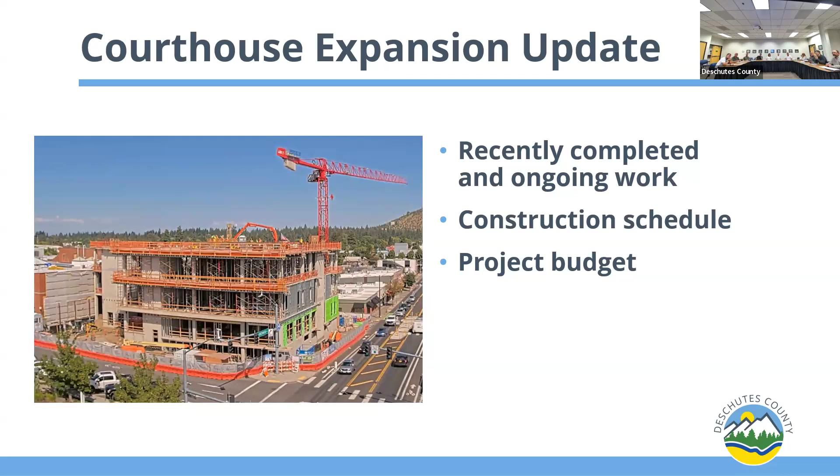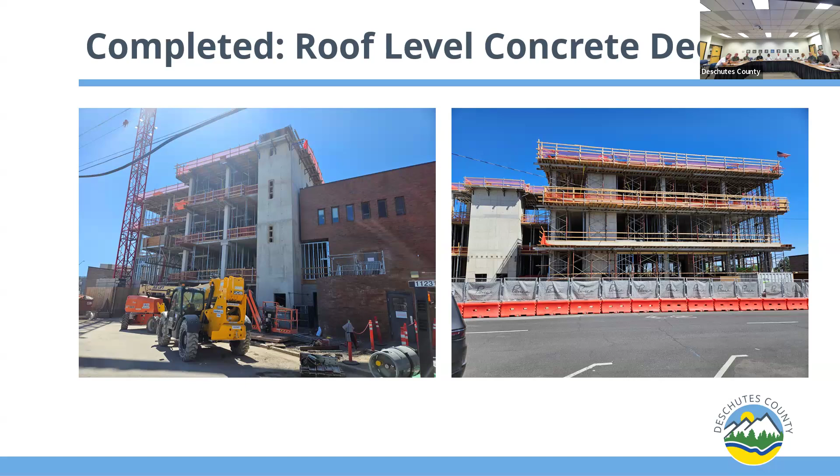Here's a view of the completed roof level deck. Pretty good views from up there. You can see Pilot Butte to the east and the Cascades to the west.

This view shows the tower crane lifting some equipment in place, and then some stub-outs of the rebar for the... not showing up on the screen. So there's rebar in place for the curb for the main mechanical air handling unit there.

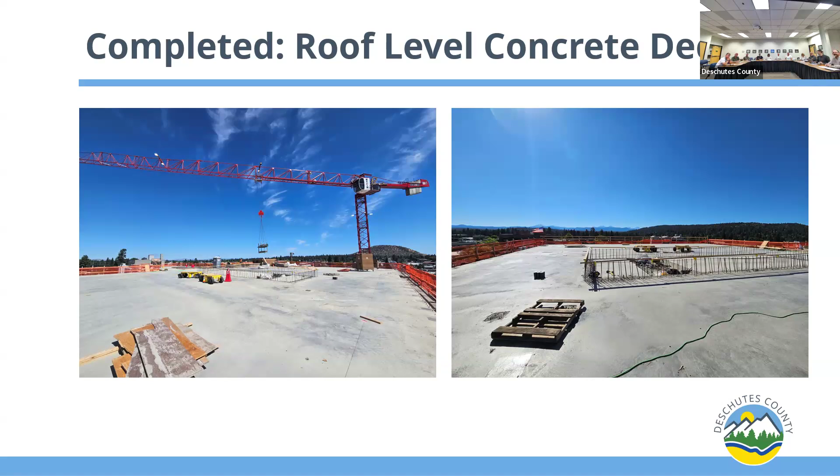This is some form work for the housekeeping pads for mechanical equipment that'll go in the penthouse, in the image on the left. I think they're in place now, or they've been staged, but some of the boilers will sit on those pads. And then there's some more progress on the concrete curb for the air handler.

It's about a 4-foot curb. It's reinforced concrete with also some post-tension cables through it, so it's a fairly significant structure. Very large air handler that's sitting on there.

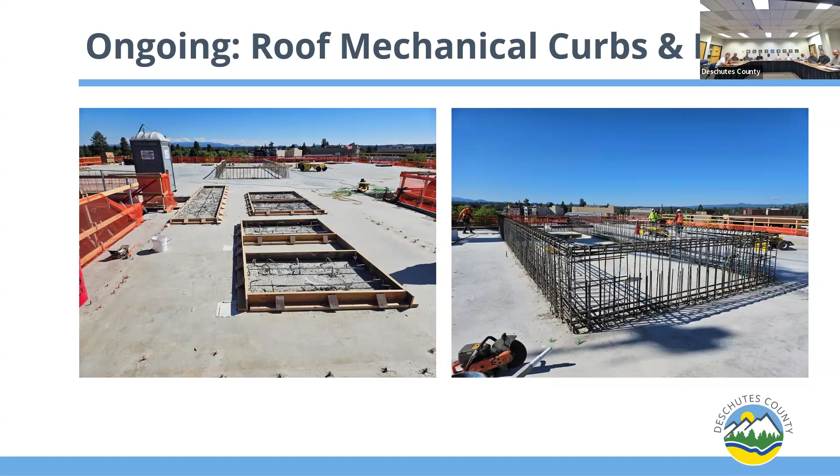They started framing up the parapet, so we went with a taller parapet on this project for safety reasons, just to avoid having to tie off on the roof. Also helps with the sheriff's office if they're up on the roof, not having to tie off.

So when they poured the slab, they placed embeds in the concrete, which allowed them to come back, and then they started welding the tube steel structure to the parapet, as you see in these photos. So tube steel is the main structure, and it will be infilled with metal stud framing.

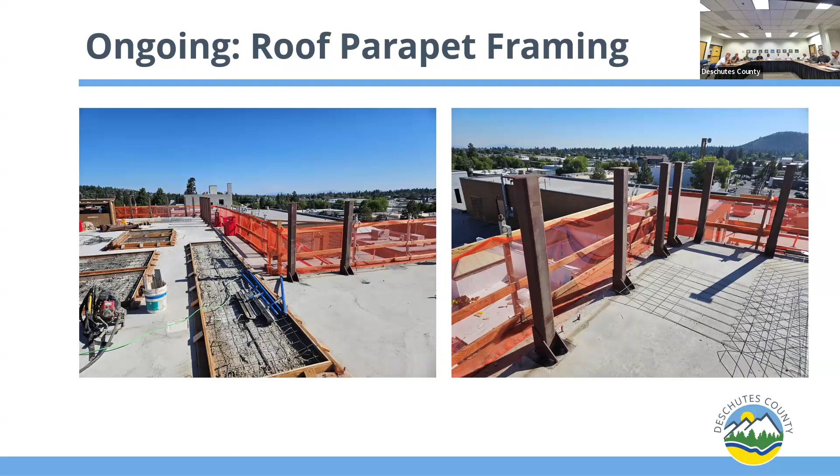And they've also started on exterior wall framing. This is a view of the southeast corner of the building at Harriman Street and Greenwood. So you can see that they've started framing the walls, some openings for the windows, and then the exterior sheathing started to come up as well. Sequence-wise, they're starting from the lower level, first level, and working their way up the building.

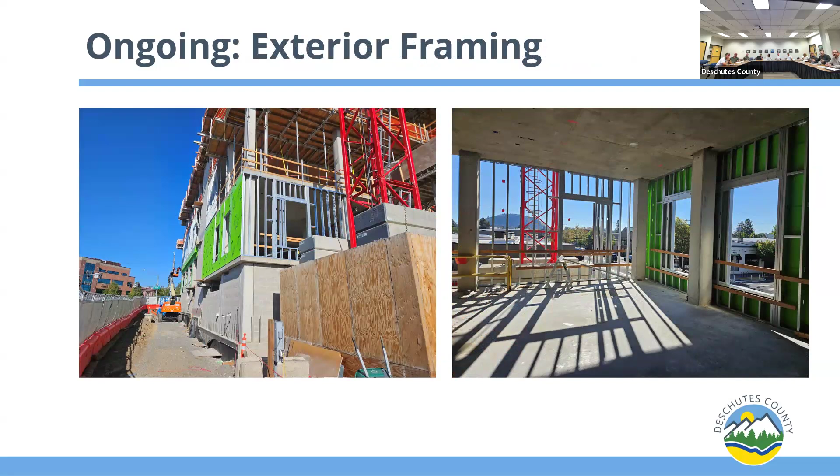As shoring has been removed from the building, they've been able to come in with CMU masonry for the basement level. There's masonry on the exterior walls, with a block out for the exhaust in the garage, and a lot of the partition walls in the basement are also CMU.

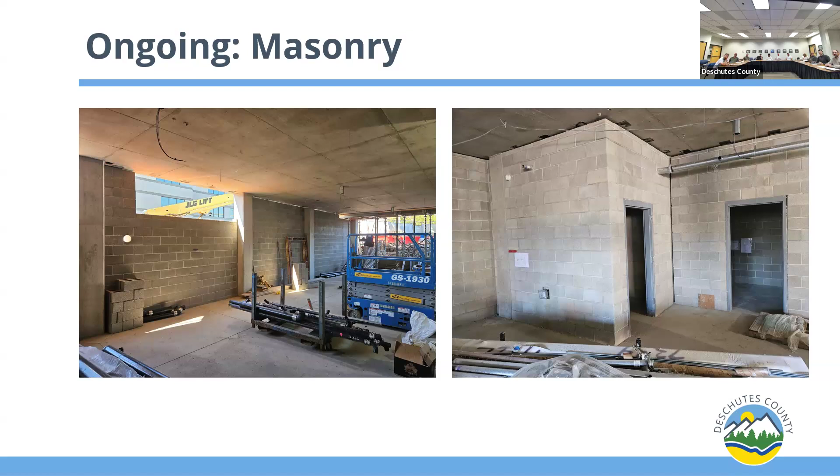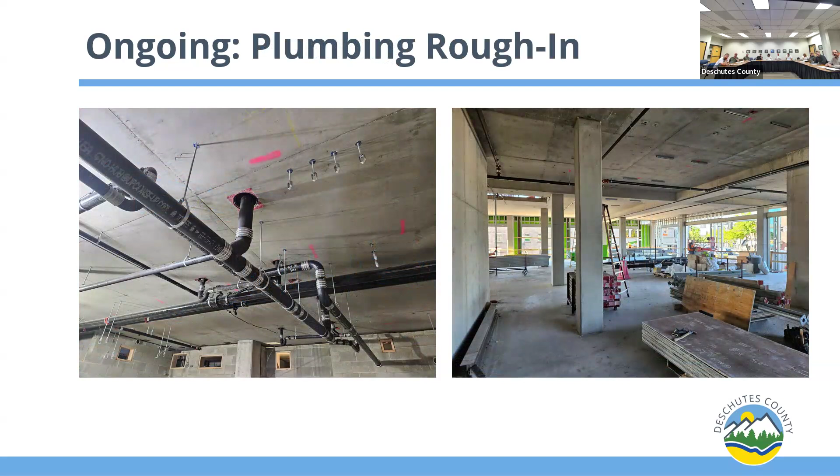Also started plumbing rough-in, working their way from the bottom of the building up. On the left, there are drain lines in the basement level, and fire sprinkler lines in the image on the right at the first floor.

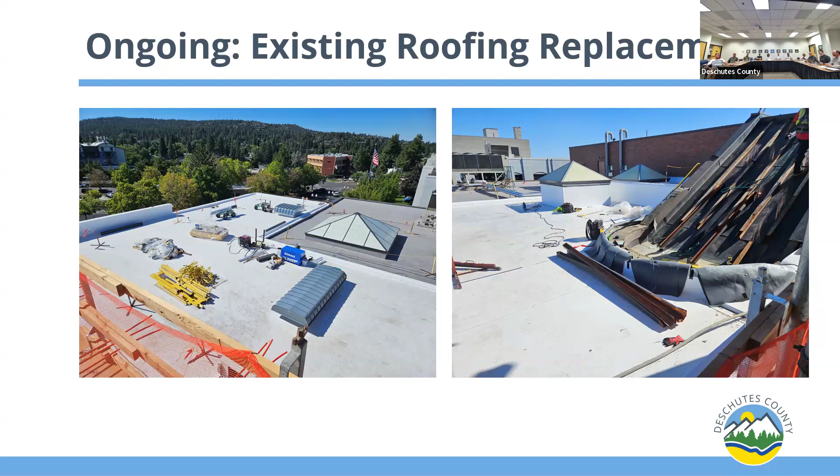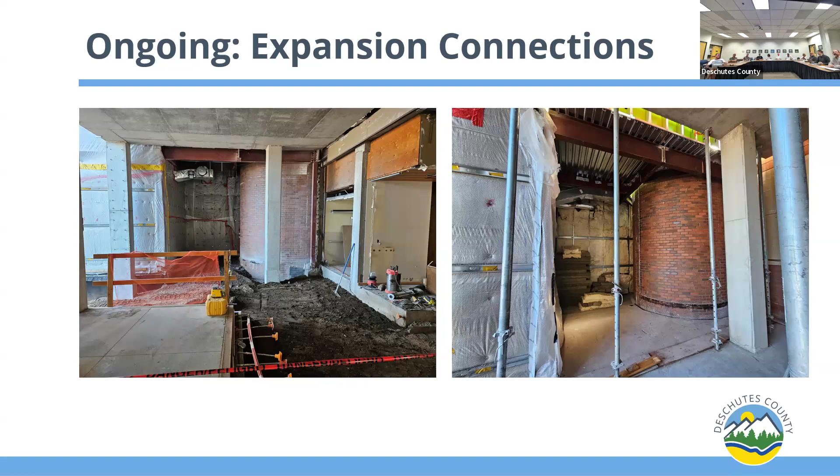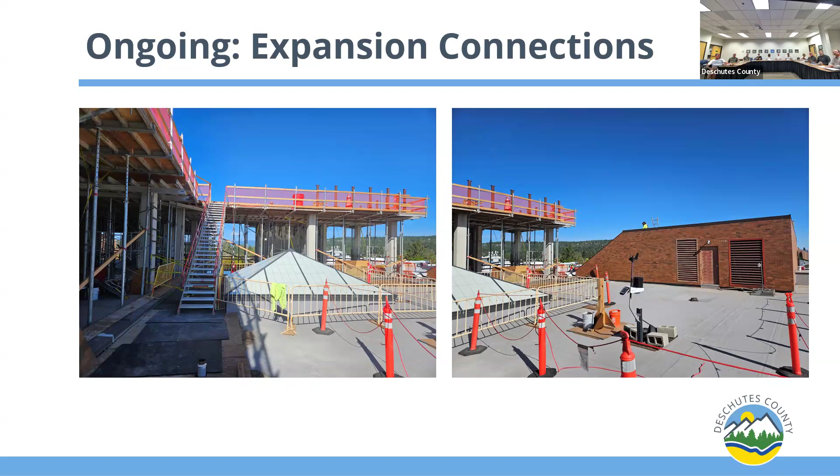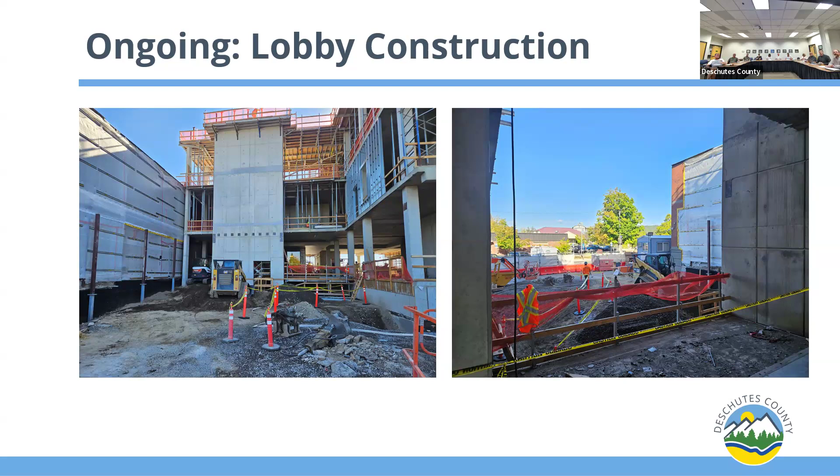Feels like just yesterday we were talking about nothing but structure, so this is exciting. A lot of new things we're starting to turn our focus to.

It's really kind of top down, trying to get in the dry before fall rolls around. So getting our rooftop unit curbs on so we can finish drying on the roof, all that parapet framing, top down, getting ready for fall which is coming, and getting our exterior wall construction buttoned up. Exterior wall framing is gonna go pretty quick in terms of getting sheathing or vapor barrier on, so at least we're sealed up in principle, that's really gonna be our focus.

You'll see when we go on our tour, we've already started a fair bit of mechanical, electrical, and plumbing rough-in, and that's gonna continue for many weeks, as well as interior walls and framing.

The main lobby is gonna be fun over the next 4 to 6 weeks and on. That's when you're gonna see that cross laminated timber come in, a very different kind of look from what we've been seeing for a while in terms of structural concrete.

And then we are getting a little bit of a jump on some of the existing building renovation work, doing some phased remodel stuff there, which is gonna really help set us up for success as we get into the end of the project coming into summer next year.

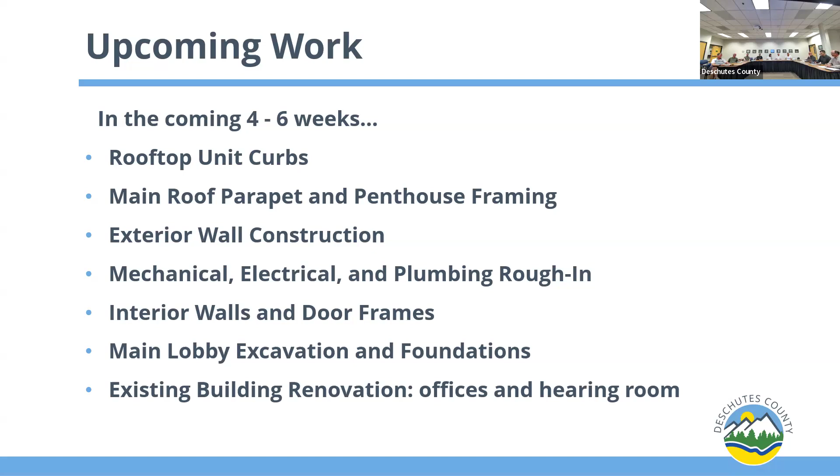Just big picture timelines, coming to the end of structure. We'll have the lobby, just a little bit there to finish up. Building exterior's well underway and we're starting to get going on interior, all of which, both exterior and interior, wrapping up coming into spring.

Like I said, framing and getting in the dry is gonna go pretty quick, but there's a lot of complicated details with expansion joints and things like that. All of that flashing work is gonna take lots of time, so we'll get it dry quick, but we'll be working on that exterior for quite a while.

Coming into the middle of fall or so, once we get the exterior to a point where we're in pretty good shape, we'll chase around the outside of the building with our site work. All of our sidewalks and planter walls wrapping up in the spring, and then we'll finish out any remaining renovation pieces, the existing courthouse, coming in summer.

All right, any questions here? I have a couple questions. Sure, I'm interested in your schedule.

So when are you actually gonna open the courthouse part? I mean, some of this looks like you could be in business at the courthouse and still be finishing some of it, or? Yeah, I think overall we're looking at a spring completion for the expansion, and we'll have some time at the end for existing building renovations. As Corey mentioned, we actually decided to get a jump on those now, starting next week on the 2nd. So that'll kind of tighten up that schedule, but really the expansion finishes in spring.

And then once we get the new public service counter windows open, we can go back and finish the hearing room construction in this building. So do you have... I don't see a line where it says when you're starting to use the courtrooms. Let's see, things end of March 26th or 27th, something like that. Yeah, that would be the move-in phase.

So a couple things to bear in mind. We have the substantial completion date for the courthouse expansion. That date is March 27th, so the city has signed off and said you can start to move in parts, pieces and get the facility ready for use. So that's substantial completion, March 27th.

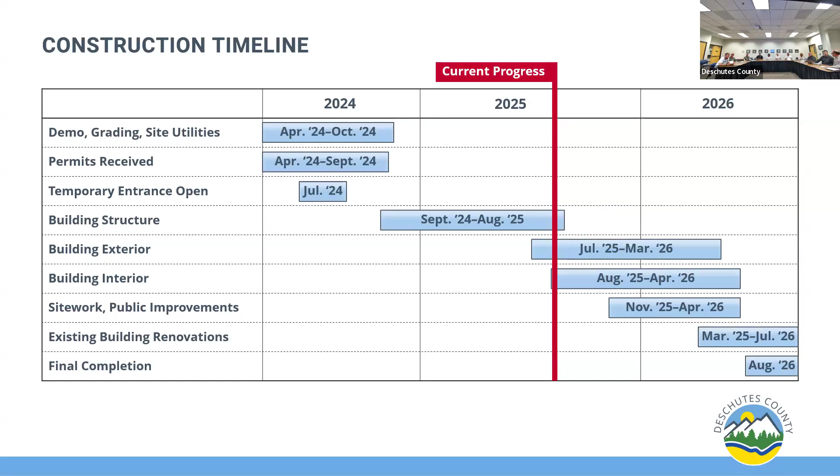That transfer is to cover additional scopes of work, we're going to upgrade all the audio visual equipment in the 7 existing courtrooms, and there's also some additions to the new systems furniture in the remodel area too. So OJD transferred that money over to the county to cover it under our project.

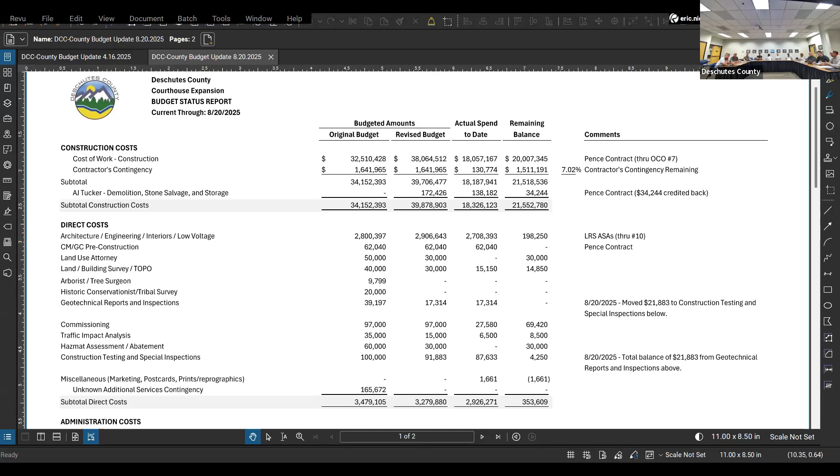So that transfer of the $800,000 was completed. It's also earning interest for the county up until the point that it's spent.

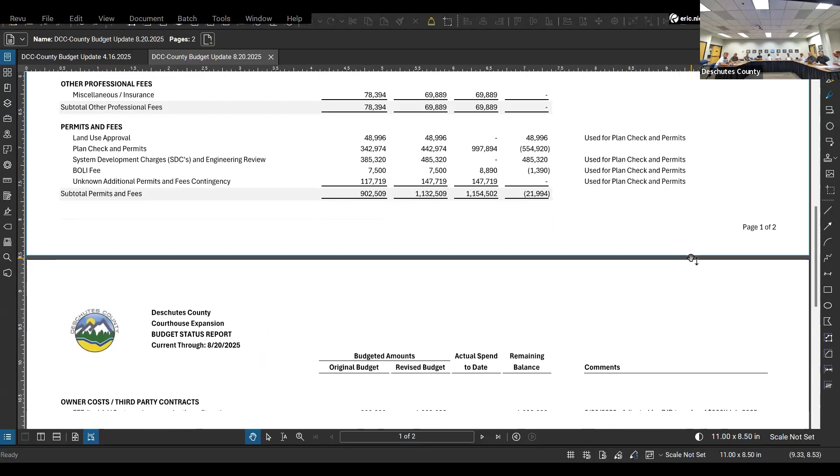Overall, the summary on actual spend to date is just over 23 million, with just over 25 million balance left to complete, so it's about 48% complete. And there's still a healthy balance left in both the GC and the owner contingency, so we're still looking good there too.

When are you going to start looking at the owner contingencies? What are you going to use it for? FFE, that sort of thing, or?

Well, we've gone through, I think we're up to 8 owner change orders so far, miscellaneous added scopes. So that's where we're pulling from the owner contingency to pay for those added scope items. My goal is to return that to the capital reserve. That's just because it's part of the project funding, in terms of our approach, doesn't mean it needs to be spent on that project.

So our goal is that it's truly a contingency. It's there to address unforeseen items and any issues that come up in construction that are clearly the owner's responsibility. But if our target goal for any project is to get to the end and have the owner side portion of that money returned internally to the county capital reserve, and on the contractor side, complete the project with the remaining reserve returned to the county as well. Realistically, we have contingency for a reason, and likely a majority of it will be spent.

But we want to take the approach that we're not going to end the project looking for things to do. We're going to make sure, as closely as possible, that it benefits the project and stays within scope. I've always seen it go to FFE, upgrades and that sort of thing, which is nice, but if you're going to do that, that'll be great.

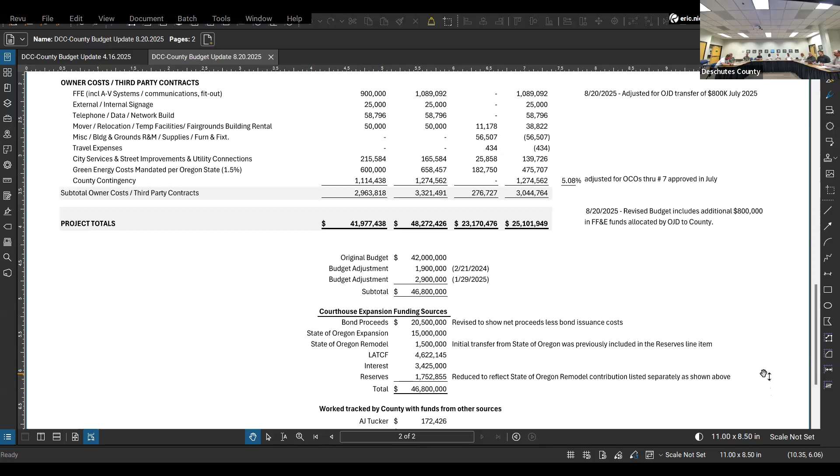The second one is related to beginning the remodel project work. As we move into the existing 1977 building, as with most remodels, we're expecting we may encounter some unforeseen conditions, added scope, or costs in order to create a good final product. One item that's already come to light is that in the original construction there are hydronic heating and cooling lines run through an existing electrical room. In preliminary inspections, the city is already requiring that we move those as part of the conditions of the permit. That's something Corey's team is currently working on final pricing for.

We know that will be a cost to the project, either on the contractor contingency side or the owner side. So those are a few things coming up. Looking at the overall contingency, we're confident that what we have in place is sufficient to address not only those, but anything else that comes up toward the end of the project. I just wanted to highlight some things we're expecting to see coming down the road.

I don't know, am I the only new member of the committee? Bruce as well, yep. I was gonna wonder if we could ask some general questions about the budget, because I'd never really looked at it before, and it's hard to understand if you don't know what some of it is.

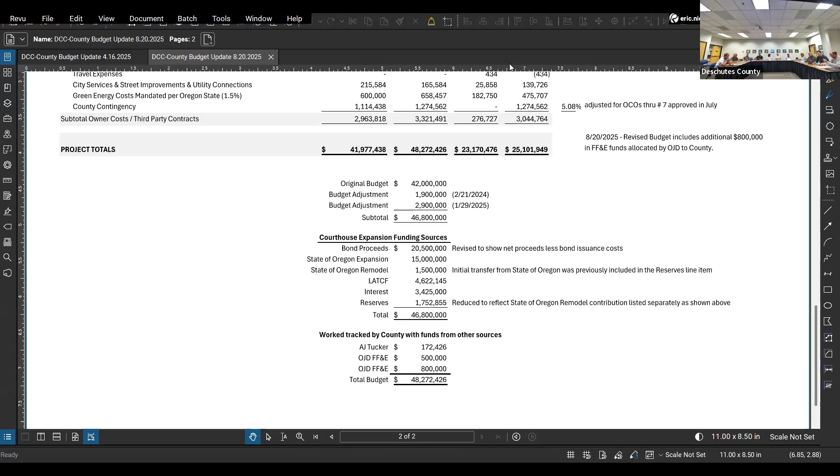So the contractor's contingency, is that because the contract allows overages and that's where you pull it out of, or is that—you already described the county contingency stuff, which is things you can add, but what is this contingency? General explanation is that contingency is there to complete the intent of the drawings, plans and specs.

So, correct me if I'm wrong, Corey, but if they bid out a certain trade and the low bidder, for whatever reason, falters and can't continue to complete the project, the cost difference between them and the next sub would be used out of the GC contingency.

Or it may be where there wasn't a good firm bid example—on your estimate you have an idea of what this is gonna cost, but you don't really have a firm bid, completely bid out with all of that. From my own personal experience, I've had some contractors falter through the middle of a project.

That's just an example. Probably a better example is waterproofing that we discovered during the excavation of the basement of the existing building. There was a lot of existing waterproofing that had to be replaced. That wasn't in the original scope of work, so contingency was used for that.

So you said completing the intent of the plans and specifications, right? And we always use the example of architectural showing something that's the intent, but maybe mechanical didn't pick it up. It could be a hose bib on the outside of the building or something like that. So the intent is there—we know we should have had something, but the bidders look at that and say, I didn't see piping, I didn't see the thing, so.